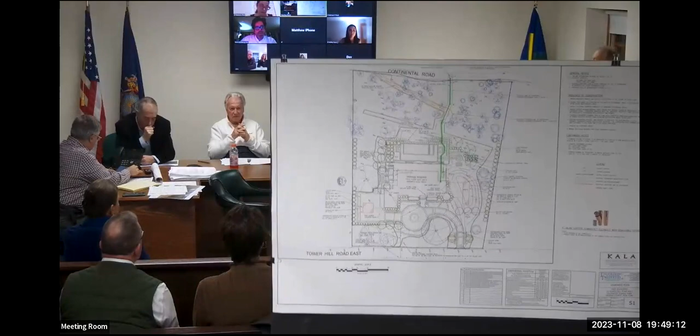It's the bright green line. One of the thoughts behind where it's now being located is that it is between the two houses versus the prior location.

Okay, right, and that brings me to the second question. You said it's going to be connected to the existing line between two houses—do you know which houses on Continental Road? Do you have the numbers it's going to be connected in between? I think one of them is the Bishko house, right?

I think it's between—what's the house downhill of Bishko? I'm sorry, I don't know. I believe, if it helps at all, I think that...

Hi, this is Jerry Bishko. It's between my house, 222 Continental, and the O'Neill's house—right between the two of them.

If I may, all of these piping changes have to do with sanitary sewer, and there are no changes proposed to the profile of the road or anything else, so there should be no effect on stormwater runoff. That was my question. And as far as it being clogged, that's still not going to affect any drains, that's happening by runoff on the road.

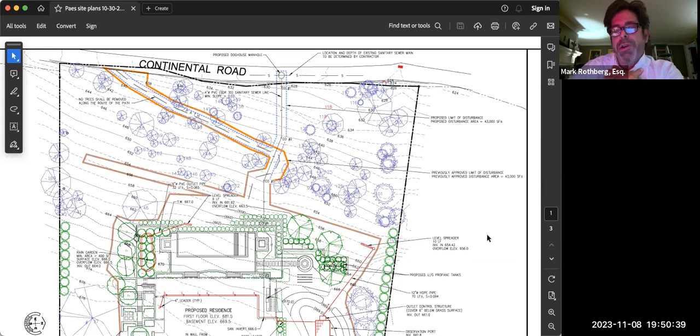Some of the current storm drains there do clog, and I actually go out and clean them myself with a rake because leaves and things can stop them up. I prefer not to add to that task, and if I don't get out there, we have additional water coming down our lawns into our basement. We've had, for the first time in 7 years, water in the basement this fall.

I just want to piggyback on that—you're saying it's a sewer line, but you have to dig that, right? Presumably you're going to be excavating that green line. Is that correct? Yes. And how deep will you excavate?

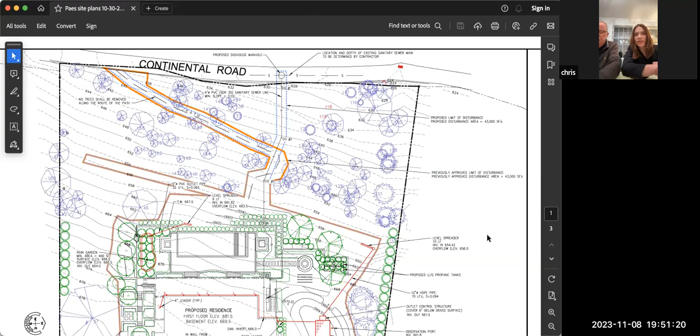Typically about 4 feet, forward, perhaps in the street we expect maybe 5 to 6 feet deep. So that's a big, long line that you're going to lay the pipe in.

During the time that you're excavating, we have seen excessive runoff since the project started. Mark has always had this problem, I think, but we are now seeing some water in our basement where we've never seen it before. So what about the time that you are excavating?

We have erosion control measures already proposed on the plan. As part of our submission tonight, we have a landscaping plan for the area of the proposed sewer connection that serves several purposes, including quick stabilization of the disturbed area, because it's a pervious area now and it'll again be pervious. We're not proposing any impervious area along that connection, but there is the risk of erosion as the soils are disturbed if there's a storm event.

Part of Karen Arndt's plan is to hydroseed the area to establish quick stabilization, and then also plantings of ferns, shrubs, and even some small trees. She's insisting that planting be done not just along the strip, but the plants she's introducing will be spread across the slope somewhat also, so it won't look like a scar in the landscape.

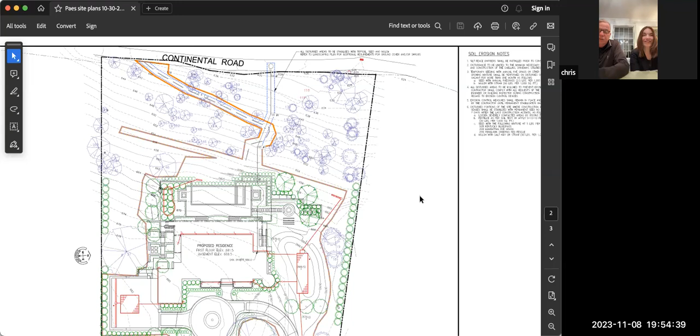The trench is going to be refilled immediately. But it's going to be dirt till spring, presumably—what kind of plants are going to grow now? We're going into the cold season. Let's go one at a time, James.

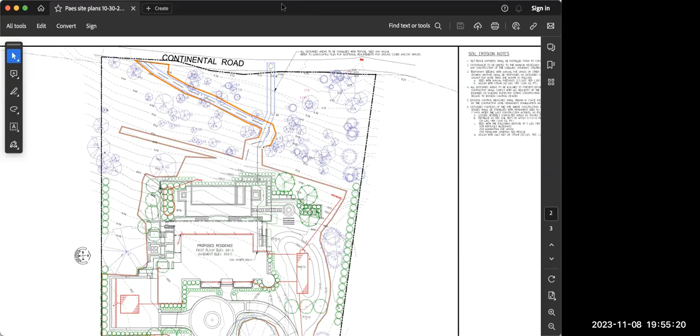I have a question—it seems to me there's a previously approved sewer line plan that looks meaningfully longer than what's proposed. So is it true that this will actually be a much shorter line and less disturbance than what you already have approved? Significantly, yes.

And in addition, until the plants actually root and do their job, there are artificial measures we put in place such as silt fencing and hay bales. There are all sorts of other things we'll use as erosion control while the plants are growing, so it won't be an open, barren gash in the hillside until things grow in.

And how long would you anticipate the actual excavation taking? The actual work to put everything in place is probably a week of work, maybe a 5-day work week. The last day or two will be in the street—that's the hardest part, erecting the doghouse and the new manhole. That would take the longest, since we have to let concrete set before we continue.

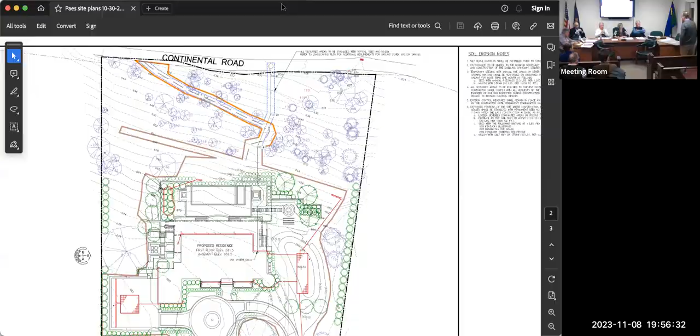Continental Road will be closed—the one-way section will be closed. We'd have to speak to Mr. Ledwith, but I think we'll make Continental two-way temporarily, so people at the bottom of the hill can come in from the lower part, and people above the construction can still come in from the upper part. It just wouldn't be contiguous. We could also put a road plate there during off-work hours to help, as we've done before on this road and others, making it two-way for the days they're working so residents still have access to their homes.

Could you comment for a minute on what a doghouse manhole is, and is it viewable from the street, or is it covered and below ground level?

It's a concrete structure—we submitted a detail, I can pass these out to the board members. It's a sanitary sewer manhole, called a doghouse because you cut a semicircle slot in the bottom, like the entrance to a doghouse, to fit over the existing sewer line. The contractor excavates the sewer line, determines its location and depth, then tailors the manhole to fit over the existing pipe. Once it's in place, they cut the pipe and make the new connection. Once installed, it's entirely backfilled and paved over—the only visible change is a manhole cover in the street.